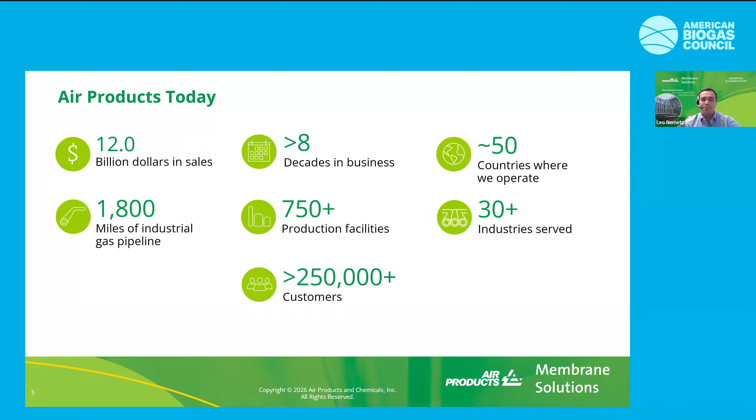Air Products, we're a leader in the industrial gas space, a Fortune 500 company, and we provide essential industrial gas technologies and applications expertise that enhances our customers' sustainability and improves their operations. As the leading global supplier of hydrogen, we are accelerating the energy transition through clean hydrogen mega projects to decarbonize the hardest to abate industries and heavy-duty transportation sector.

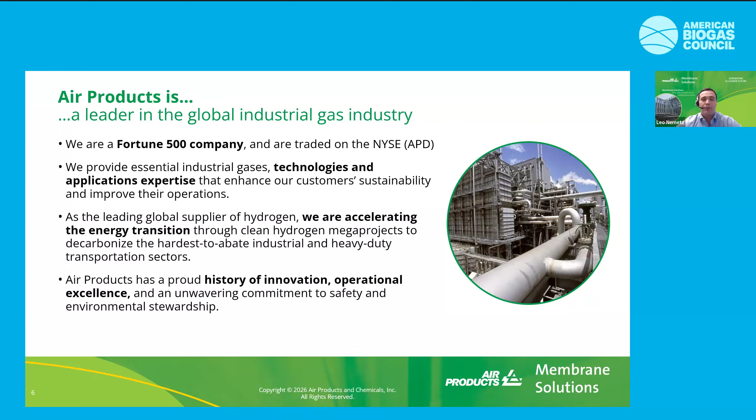Air Products has a proud history of innovation, operational excellence, and an unwavering commitment to safety and environmental stewardship. Air Products has a total safety philosophy. We believe that maintaining a safe workplace is a fundamental and moral responsibility. And we take the approach that all accidents are preventable, and the only acceptable goal is 0 accidents and 0 incidents. And we strive to achieve that goal at every location, every day.

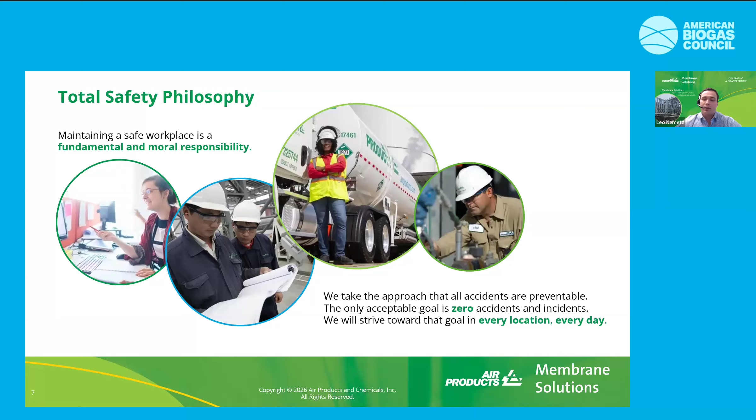So to get into Air Products Membrane Solutions, we have 4 locations. Our headquarters for the Membranes Group is here in St. Louis, Missouri, and that's where we manufacture all of our membrane equipment. Our corporate headquarters is in Allentown, Pennsylvania, and then the Membrane Solutions has 2 other office locations, one in Norway and one in China.

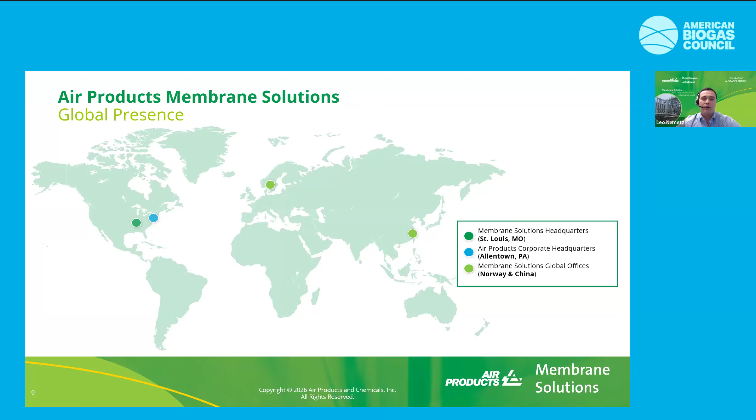So a brief history of Membrane Solutions. This group was originally owned by Monsanto and called Permea, and Permea commercialized the first gas separation membrane systems in the 1970s and 1980s. In 1991, Air Products acquired this business and the trademark, and then in the 2005-2010 timeframe, we expanded into biogas via our network of OEM system builders. Recently, in 2024, we broke ground on expanding our manufacturing facility, and that expansion will be completed this year.

So Membrane Solutions has 4 different business units: prism membrane separators, and that's really how we support the biogas market. In this unit, we support customers by selling individual membranes to system builders or OEMs and allow them to build systems for themselves or for end users or customers that way. Our marine system is we build systems for maritime shipping, and that can be for fuel safety, fuel efficiency, as well as for enhancement of goods being transported through controlled atmospheres. We also have engineered-to-order systems, primarily for the refinery space and hydrogen recovery, as well as global service and support that we provide across all three of these business units.

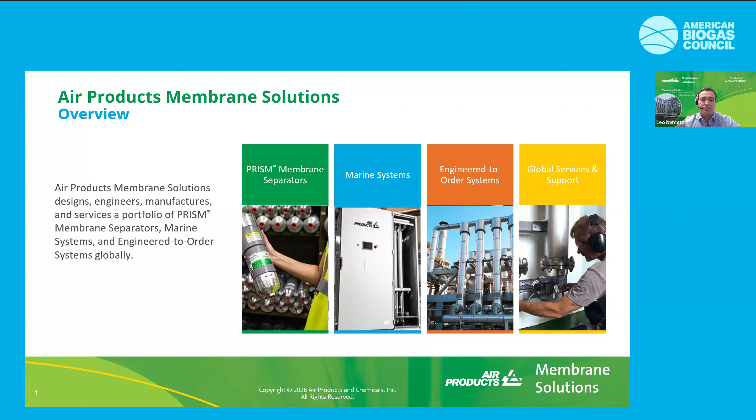To get into prism membranes a bit more, this is how we support our biogas upgrading, as well as biogas dehydration, as well as our bio-LNG production. But membranes can also be used for nitrogen generation, for air dehydration, as well as for fuel safety on airplanes, and for oxygen generation.

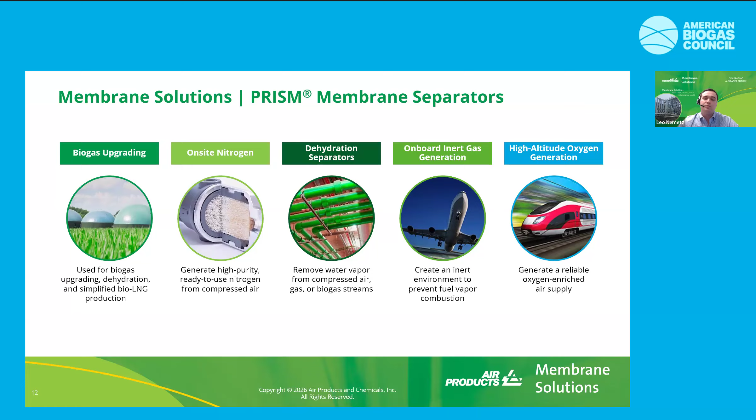So at Air Products today, we have thousands of references across all of these different business units and across different application spaces.

So what is a membrane? The textbook definition is a discrete thin interface that moderates the permeation of a chemical species in contact with it. A membrane separates chemicals based on dimensional differences, size differences, as well as how the chemical species interacts with the membrane material.

At Air Products, we make polymeric hollow fiber membranes, but membranes can be made of other materials beyond polymers, including metals and ceramics. They can also come in different forms like flat sheet or spiral wound, as well as our hollow fibers.

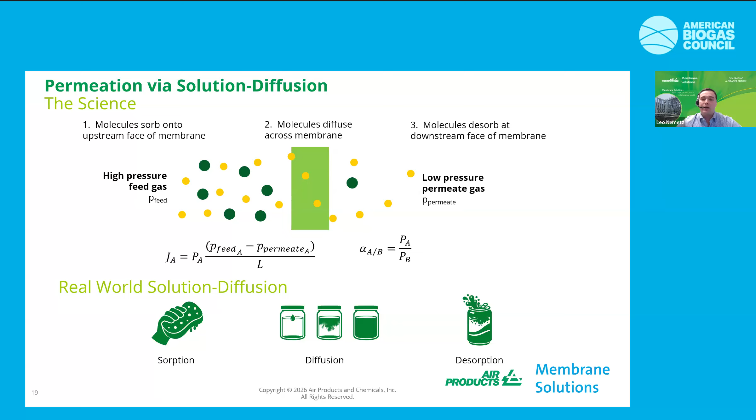So if we apply this to biogas, what does it look like in a hollow fiber membrane? We zoom in on our membrane into the fiber bore, or the inside of the fiber. Our biogas mixture is fed through the bore. Our fast gases like CO2 and oxygen permeate across and are collected on a low pressure permeate side, whereas your slow gases like nitrogen and methane are concentrated and collected in the non-permeate at pressure.

As I mentioned earlier, how well you can separate a gas depends on their relative permeability. Fast gases like hydrogen and CO2 would be easy to separate from nitrogen and methane, whereas gases with similar relative permeabilities like methane and nitrogen are not separated well by membranes, and typically methane and nitrogen are not separated by a membrane.

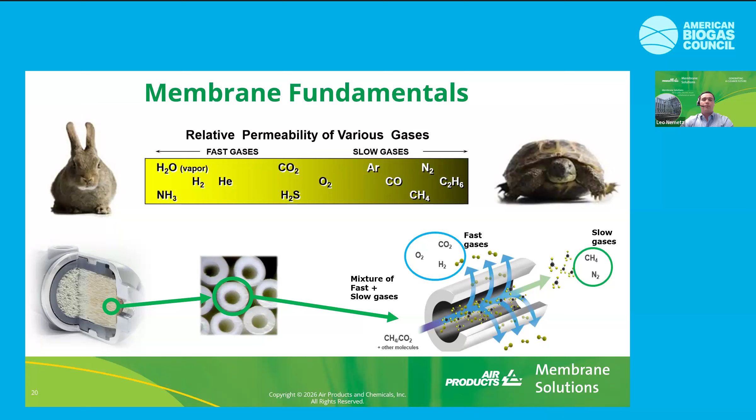Moving on to how do we apply membranes to biogas. When I talk about biogas, I'm talking about a mixture of methane and carbon dioxide formed from the anaerobic digestion of organic materials.

That can be done in a digester or in a landfill. There are byproducts from the bacteria breaking down organic materials aside from the methane and carbon dioxide - there's also H2S, ammonia, VOCs, and sometimes siloxanes.

It's important for membranes to last a long time to remove your VOCs and siloxanes, and that's typically done in pretreatment by a carbon bed, or a carbon bed and particulate filter. Removing these things will ensure membranes last a long time and perform as they were designed to.

The simplest system you could build with a membrane is a single stage system, where your feed gas is sent to a group of membranes. Your slow gas, methane, will concentrate in your non-permeate, whereas your CO2 will concentrate in your permeate, the reject or vent gas. Here we have a group of membranes showing what a single stage, or any stage in a multi-stage system, will look like.

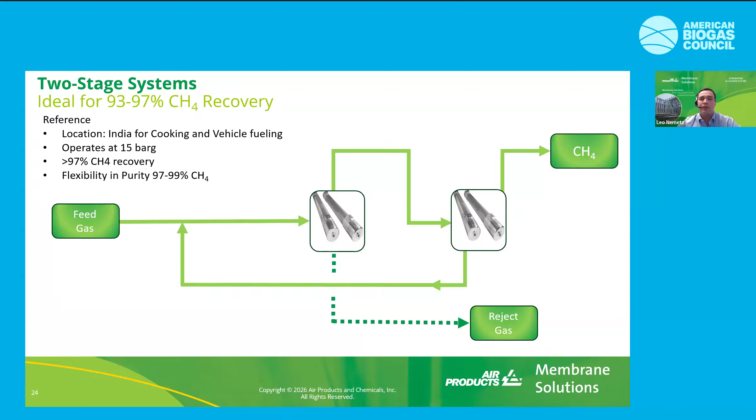In India, they typically take the biomethane product and compress it into gas cylinders. They can use those cylinders either for cooking, which doesn't require as high purity methane, or for CNG for vehicle fueling, which does require the higher purity.

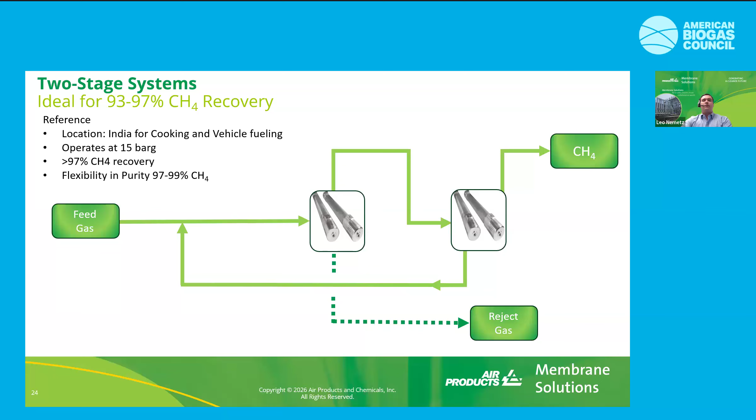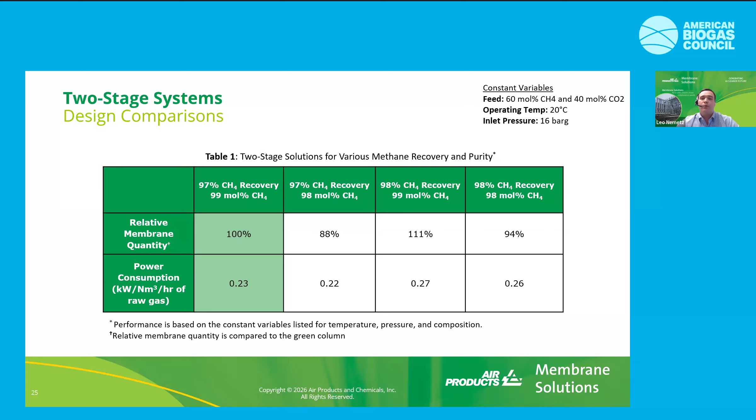So the two-stage system works really well up until that 97, 98% methane recovery. Once you want to increase your recovery beyond that, it's best to move on to a three-stage system.

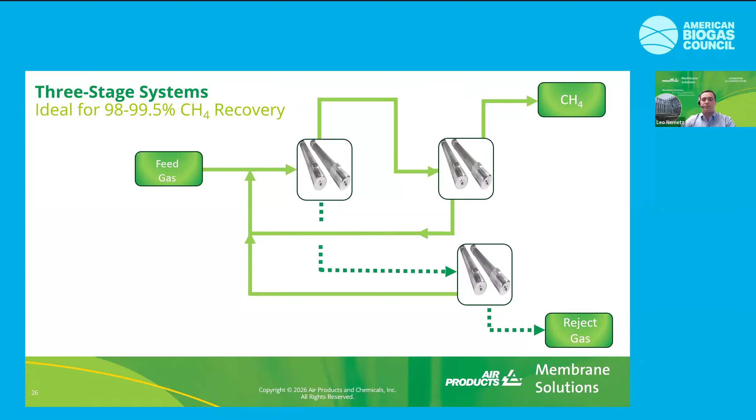This is one of the more common design choices OEMs make. I want to give a reference here: we recently, in the last year, had this system start up in Europe, one of our 200 references in the biogas space. Their target was grid injection. They're operating at 17 bar gauge, achieved about 55% recycle, 99.5% methane recovery, and less than 1.25% CO2 for their product.

Beyond just the basic three-stage design, there are a couple of pieces of equipment you can add to enhance performance or shift your cost between operating and capital cost. One of those is adding a blower between stages 1 and 3. This blower allows you to operate your first and third stage at greater partial pressure differences, which increases the driving force across your membranes. This really sees a major benefit in reducing the number of membranes required for the system to function.

One other piece of equipment you can add is a vacuum pump on your vent gas or reject. This similarly allows you to operate your first and third membranes at greater pressure ratios or with greater driving force. The major difference is a vacuum pump tends to have a bigger impact on recycle, compared to the blower having an impact on membrane count.

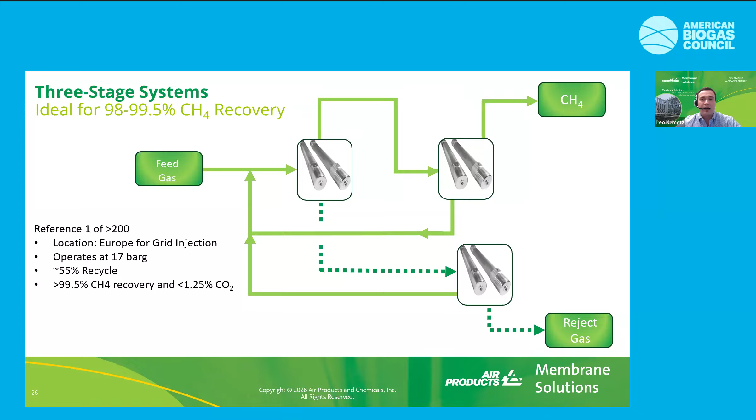So just to go back, without those pieces of equipment, see the typical three-stage design here. We're going to compare our three-stage system with our 60% methane, 40% carbon dioxide feed at 16 bar, 20 Celsius, targeting 99.5% methane recovery with a product purity of 98.75% methane.

So three-stage systems work really well up until this 99.5% methane recovery. But as regulations start to target methane slip or methane emissions, it may be desirable to move beyond 99.5% methane recovery. To do that, Air Products has a proprietary four-stage design.

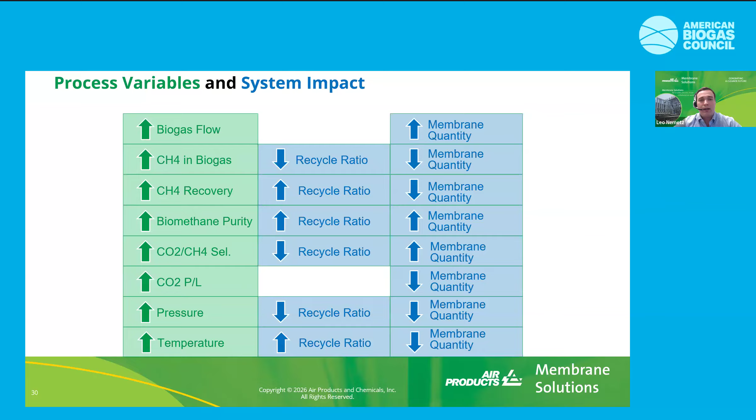And finally, while you're operating a biogas system, having an increase in pressure typically results in a lower recycle and less membranes being required. While for a change in temperature, an increase in temperature typically increases your recycle, but it decreases the number of membranes required.

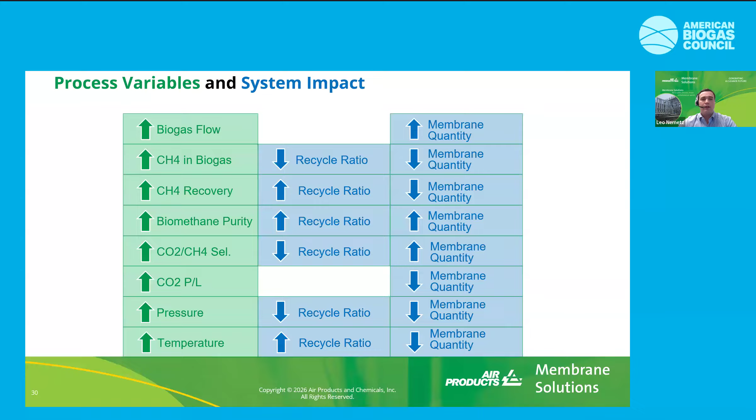So Air Products, we've been a pioneer in the membrane space, and we continue to innovate in this space. We've operated our own systems across a number of different applications and supported OEMs in developing their systems, and have experience in over 4,000 different references across the membrane space. We really value our design partnership and supporting our OEM network globally through our applications and engineering support.

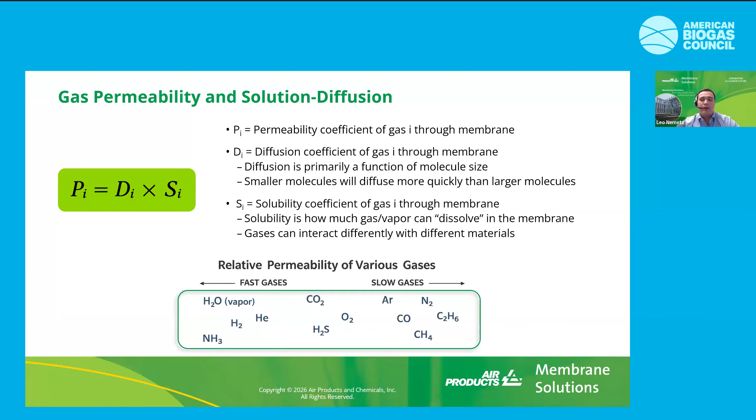I would say that membranes have a few advantages in general. There's no moving parts within a membrane. It's a static piece of pipe filled with our plastic straws, essentially. They're minimal maintenance as well for membranes when you compare to other technologies for biogas upgrading. Yeah, I think that's my answer for that question.

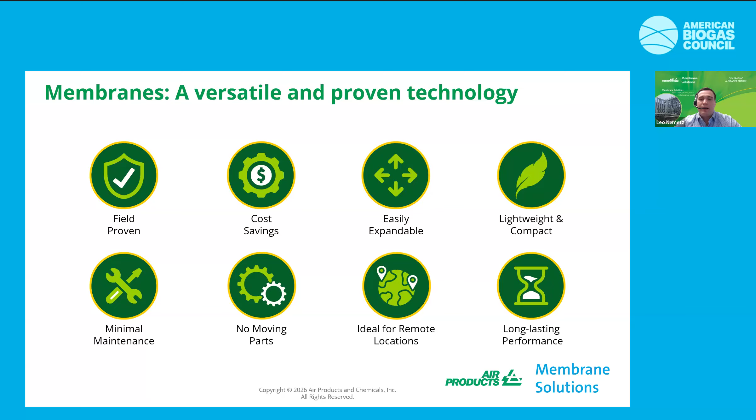Oh great, how much of the produced methane is needed to supply the energy requirement of a four-stage system? I'm not going to have an exact number for you, but you could see that within a four-stage system, your power consumption at the high recovery is less than a three-stage system operating at that same condition. So just by comparison here, your power consumption will be lower than a three-stage operating at the same space once you are in that high recovery, the greater than 99.5% range.

Do your membranes handle H2S? Yes, our membranes are resistant to H2S. We have systems that are operating now at 7 years, and they've been operating continuously in H2S environments between 3 and 5,000 parts per million H2S for the life of the membrane, and they're still performing as designed.

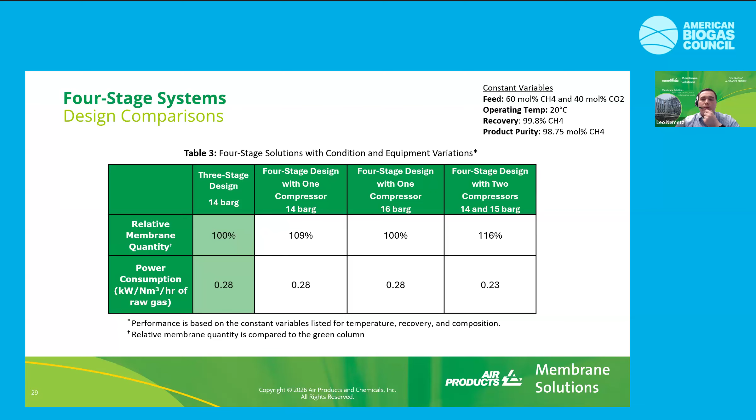Is there a minimum flow rate for the four-stage design? I don't know what it is off the top of my head. It'll probably vary depending on the amount, the methane-CO2 mixture that you're feeding to it. There is some minimum, just because if you don't supply enough gas to a membrane, all of the gas will permeate across. But I don't know what that is exactly. If you reach out to us with an example, we can provide some more numbers on that.

What would you recommend, other than a coalescing filter, is best to remove any oil carryover from the feed compressor?

Coalescing filter is a good start. My understanding is some compressor vendors provide as part of the compressor package a way to minimize or prevent oil carryover, which can include chilling the gas stream or chilling the gas-oil mixture after the compressor. So: compressor, chiller, reheating, coalescing filter. You can use an activated carbon bed and then a particulate filter before the membranes, and with that combination you should be able to achieve 0.01 milligrams of oil per cubic meter of gas. There's an ISO specification for that as well. If you reach out, I can provide that number. I don't remember the ISO spec offhand.

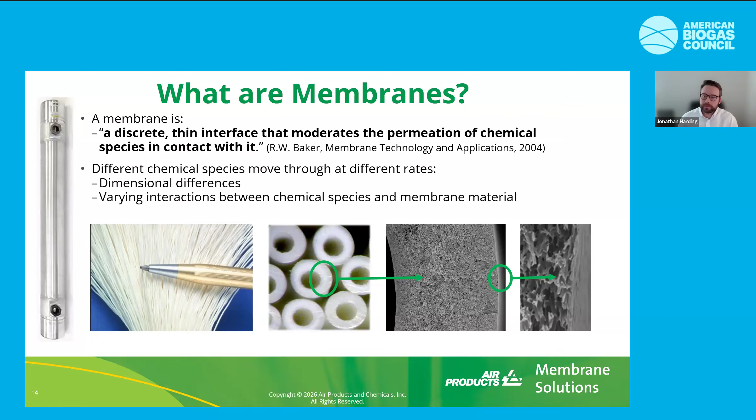In the four-stage example, the operating temp is 20 Celsius—is that constant across all four stages? That's a good question, not necessarily. When we talk about 20 Celsius, it's typically relating to the gas fed to the first membrane, and here it's also the third membrane because we have heat exchangers after the compressors. But your second stage membrane will probably be operating a bit colder, and the same for the fourth stage membrane. I highlight on my last slide that temperature is a variable we can change or optimize for customer needs—increasing temperatures in different spots to get benefits like decreasing the membrane count or influencing the amount of gas that's recycled.

So is everything operating at 20 Celsius? Not exactly—it's the first and third stage, and then that temperature can be optimized per customer. Typically 20 Celsius is a good starting spot for that conversation about where we should be moving temperature.

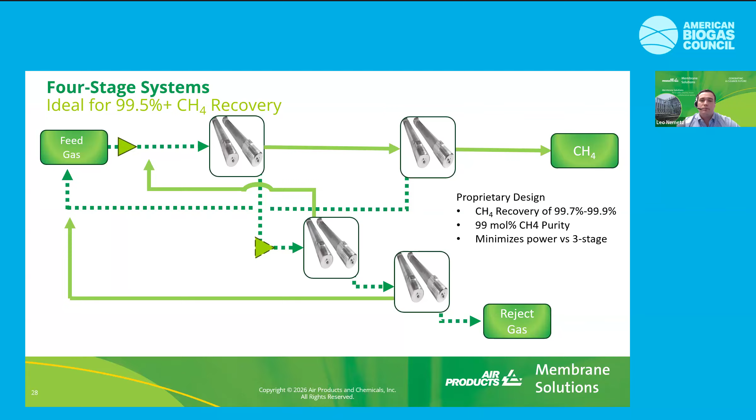Got it. When using the membranes for H2S removal, does it shorten the life of the membranes compared to those that don't see H2S? No, H2S does not have an impact on membrane life. What is the recommended pretreatment for landfill applications upstream of the membranes?

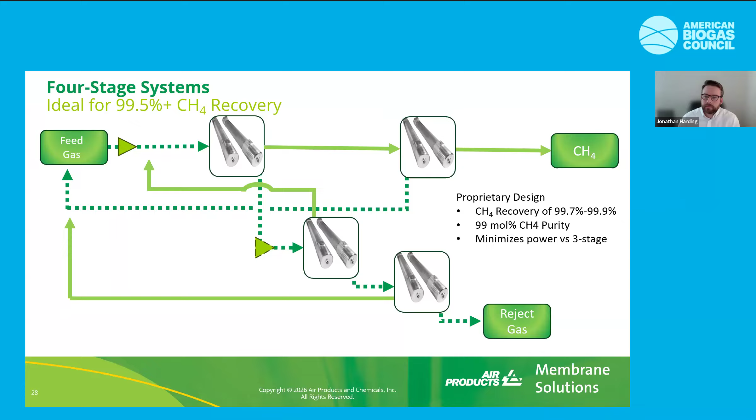Landfill gas certainly has more VOCs compared to anaerobic digesters that are using crop waste or animal waste as the feedstock.

Typically, the recommendation would be a lead-lag carbon bed, which allows you to monitor the concentration of your VOCs between your first and second carbon bed, and ensure that once you have breakthrough in your first bed, you can switch and regenerate it while your second bed is still online. That's typically the most common thing I've seen for VOC and siloxane removal.

What is the minimum and maximum pressure to operate the membranes? For our biogas membranes, the maximum operating pressure is around 17 bar gauge. The higher the pressure, the better your performance, so somewhere around 7 or 8 bar gauge is required. There may be some cases where, if you're using a single membrane stage for polishing or final upgrading off of something else, you might be able to operate between 4 and 7 bar gauge, but your efficiency is going to be quite low.

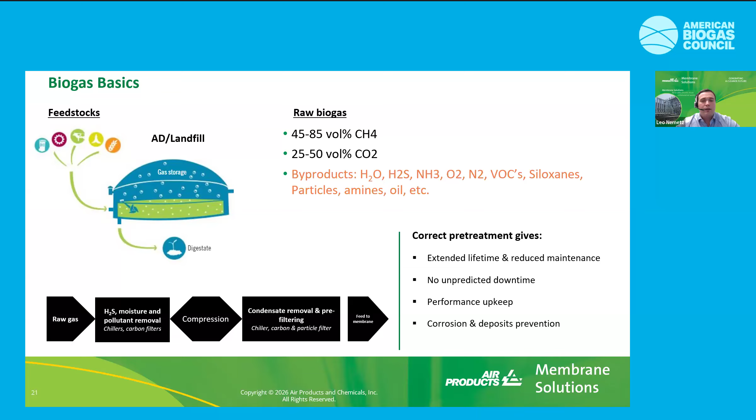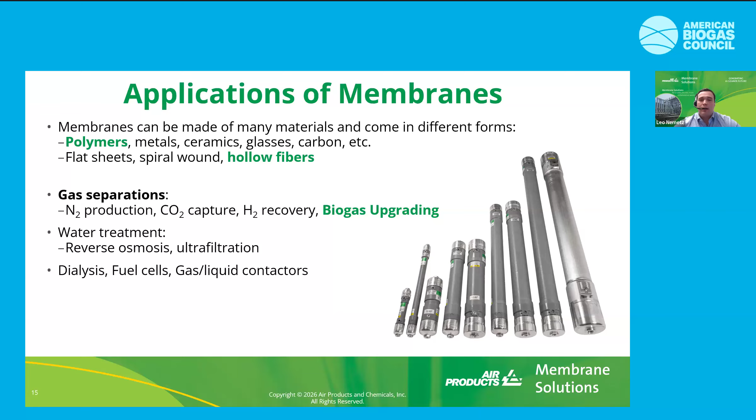How much N2 can you remove from CH4/biogas? Basically none - nitrogen and methane, the molecular size difference between them is less than 0.02 nanometers, so their diffusion is nearly identical. In solubility, they often have similar solubilities across polymers. So nitrogen and methane separation by membranes is not really possible. There are a few polymers that can do the separation, but it's very inefficient and typically not done by membrane technology. For Air Products, we essentially don't separate them.

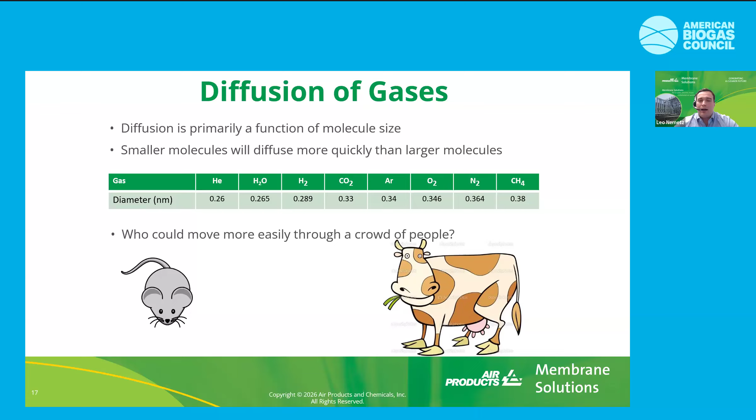How much of the produced methane needs to be used to provide the energy requirement of a three-stage system? That's a good question I don't really have an answer for. I don't know how much, if you were to use part of your product stream to produce that - you'd give an estimate of your power consumption in kilowatts per meter of raw gas. Not sure if that's really an answer to this question, but it's a little outside of my expertise.

Which are the worst VOCs for the membrane, and what quantities should you avoid? Typically we've seen things like aromatics, alcohols, and ketones tend to be the most detrimental. Concentration-wise, it really depends on whether you're talking about individual VOCs or mixtures, as a mixture of VOCs can have a compounding impact. Having a ketone on its own could be one order of magnitude, whereas if you have a ketone, an alcohol, and an aromatic together, the impact could be significantly greater at lower concentrations. Typically we recommend having less than 0.01 milligrams per normal meter cubed of VOCs - that's related to the ISO spec I mentioned earlier.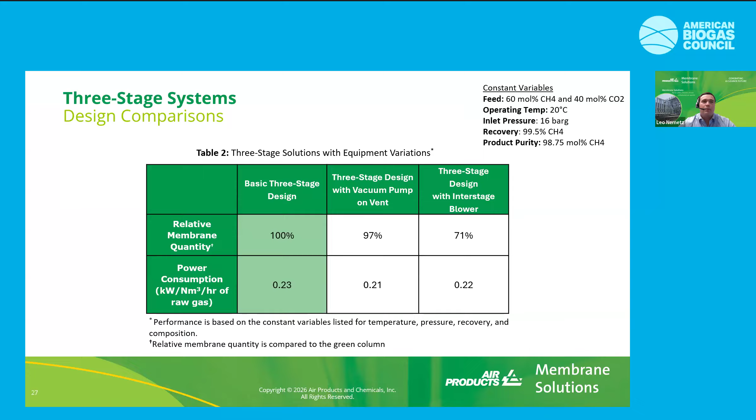We are currently using a 6-inch Evonik membrane to upgrade biogas. If we want to switch to an Air Products membrane, is it possible to swap the membrane only? That's because they use a cartridge design. If you look at the rack assembly, we also have a 6-inch diameter, 5 foot long membrane, so I think the answer is yes, you could make the switch. If you want to reach out to us to talk more about your specific system and what you're looking to see with the change, that would probably be a good first step. Then from there we can talk about sharing dimensional drawings and that sort of thing.

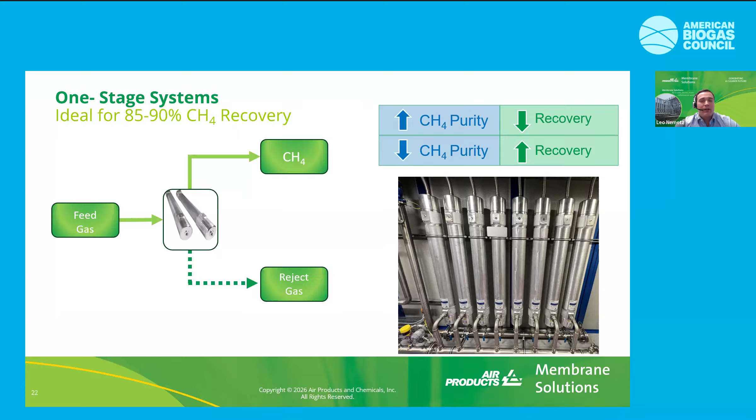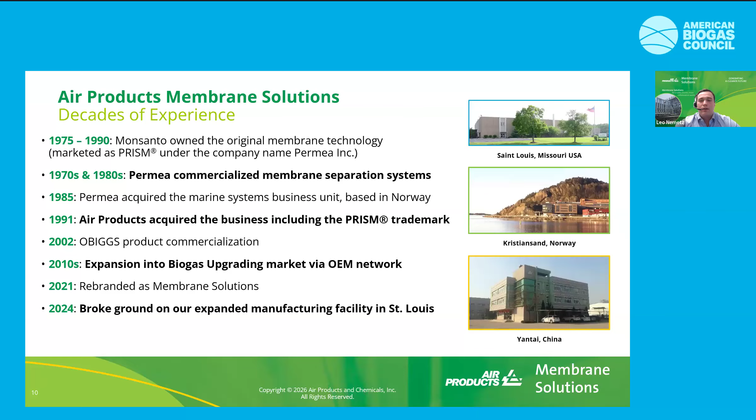Going through the last few questions here: compared to membranes in the field, does Air Products offer a competitive price point per module? Of course. Like I said earlier, Air Products has been operating membrane systems since the 90s. The business unit itself has been operating and had commercial success since the 1980s, including the first commercialized gas separation system. When you look at that, as well as our references across the space—biogas, process gas, nitrogen systems, marine systems—not only does our history and operational excellence and the support we provide add value, but we have to be competitive in that space as well.

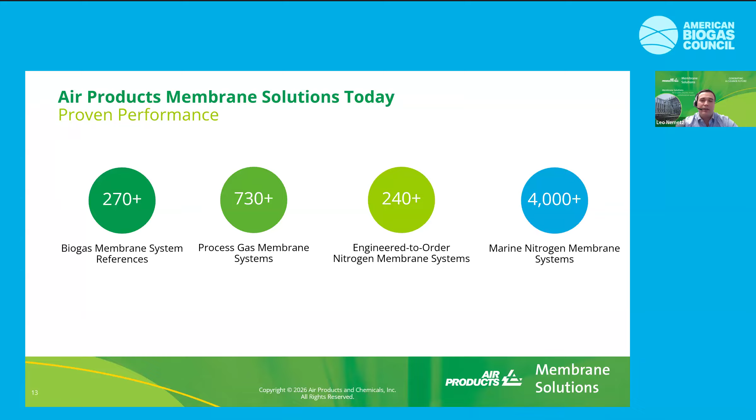No, we do not. There is no PFAS in our products. We have extensive internal reviews to ensure we're complying with regulations, both existing and potential new ones, and we've made sure that does not impact our manufacturing process or our products.